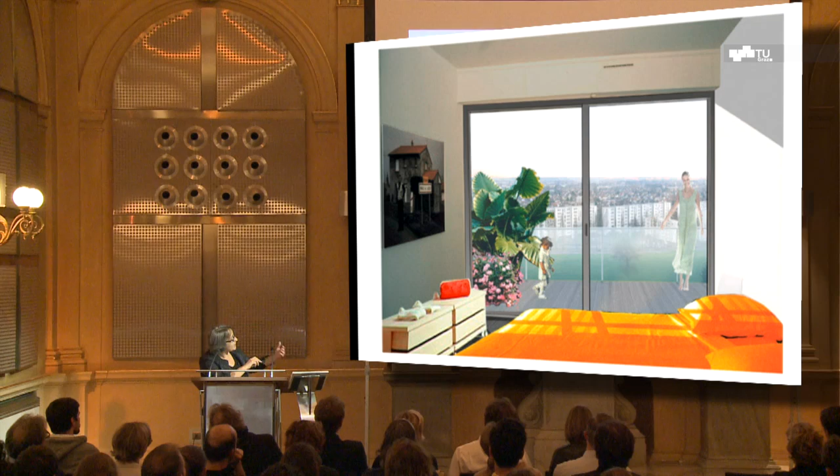So open the walls when there is a very small window and gain the view and make an extension in front. It's not a lot, but it changes radically the life inside. Making extensions when the flats are too small, and that was also possible to make it, and also to make it without emptying the building.

It means that it was important in the study to find the method in order to keep people inside, because one of the problems, for example, in France, is that we miss a lot of dwellings, especially in Paris and in the suburbs. And when they need to renovate a building and to empty the building, it's a very long process to find empty dwellings to remove 100, 200 families. So it was important for us to study the possibility to make the transformation without removing, or removing very few people inside.

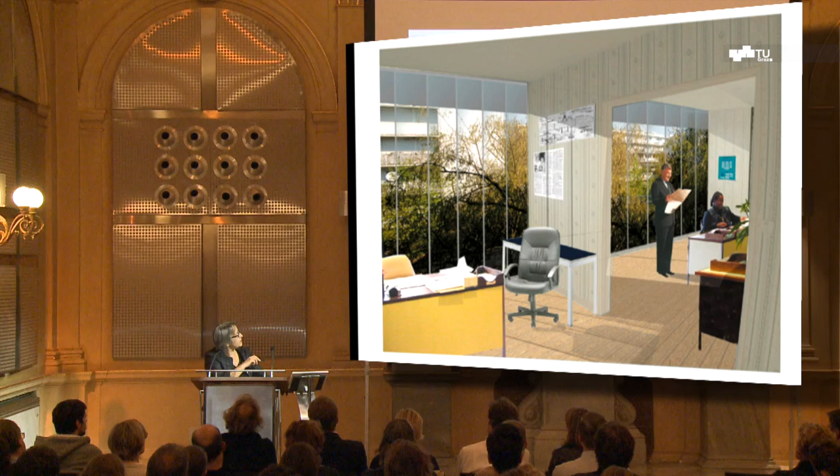Also, this transformation could be the opportunity to reintegrate common facilities that very often have disappeared in the building. There are just a few buildings now where there are housekeepers, where there are common spaces. It's also the possibility to introduce mixed use in the lower levels, for example, offices for companies, but also offices which could be used by people living in the same building or in the neighborhood, but also facilities for the community.

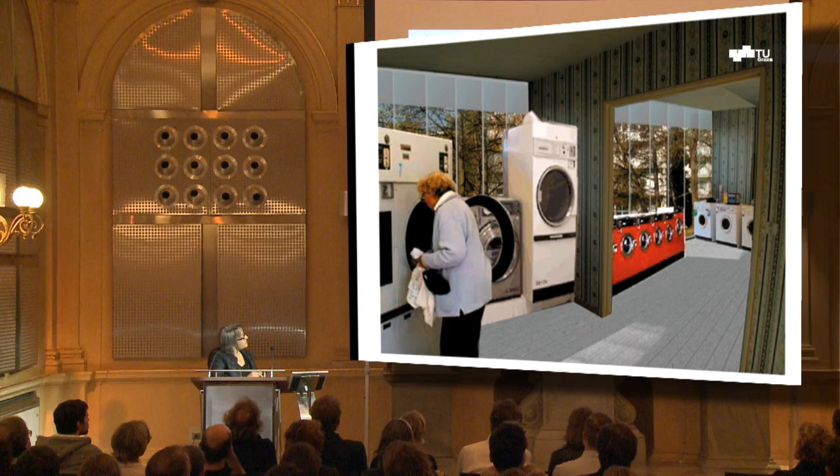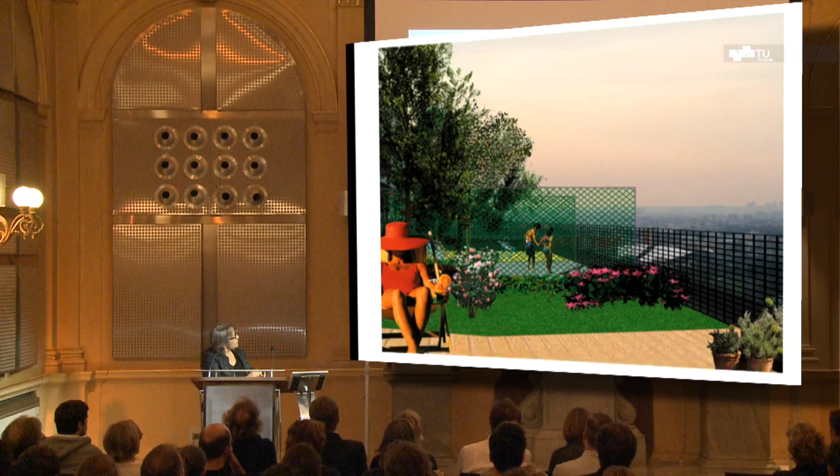Everything that can reintroduce links, relationships between people, because one of the problems in these neighborhoods is that they have become only residential. And people very often stay at home. They have no more links with the others because there are so many problems and nothing to do outside. So the links between people are very often cut. And also the reuse of the roofs that could become more interesting terraces or little gardens.

And we went quite far in this study, and we studied all the technical aspects in terms of structures, of secondary systems, and also in terms of cost, because it was very important to defend the idea that transformation is less expensive than demolition and rebuild, because very often you will hear this: no, we cannot transform because it's too expensive. It's better to demolish and rebuild.

We were talking this morning about the Palast der Republik in Berlin, and you said that they spent a lot of money to take away asbestos. But finally, when asbestos was not there anymore, the building was quite new, and it was possible to reuse it, but finally they demolished it. So it was very important to go against this idea that transformation of the existing costs more than demolition and rebuild.

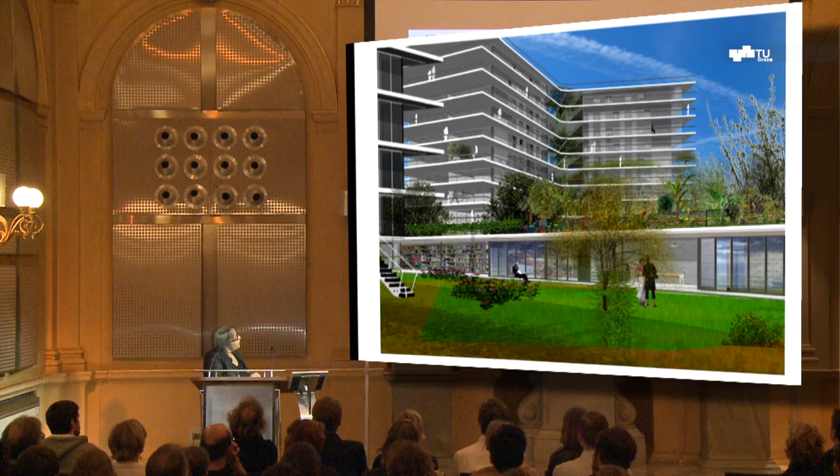And for example, for this building, we did quite a detailed project to know what was possible to make new housing inside. And making this work from the inside, from the quality of living space, produces at the end a very big transformation of the building, the same transformation of the image as a demolition and rebuild. It was also interesting to study the possibility of using better the land around the buildings and to densify a little bit around the buildings to introduce public equipment or other functions.

So this study was not really used, and finally we gave it to different ministries, but it was put under the table. But we managed to publish it in Spain, and we could continue to work on that question with very few examples. Finally, we are more invited to talk about it than to do it, and maybe it's one of the negative situations that we can observe today: the good examples are very interesting to know, but many times when it's the moment to decide, the decision is not there, and finally the owners do as they did before, just making insulation or just a low renovation.

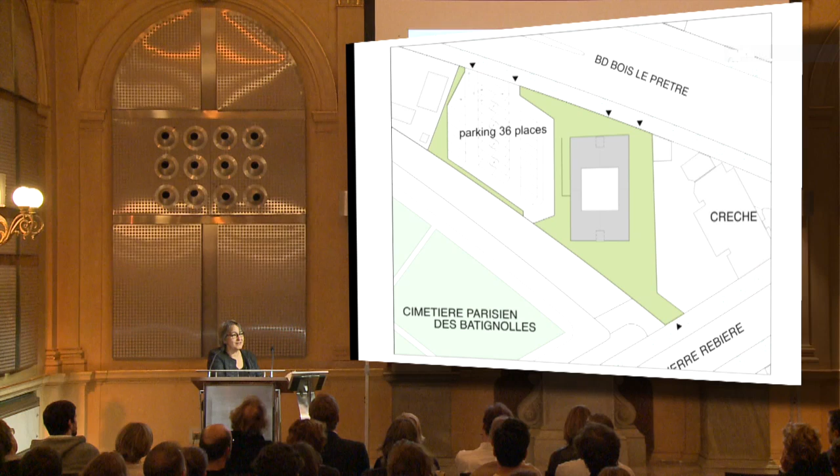And 20 years later, it was necessary again to make something on this building, which had become very bad. It was called Alcatraz in this part of Paris, because the situation had become very bad. So the city organized a competition. They had in mind first to demolish it, but for different reasons, they decided not to do it and to keep it, maybe because they found some difficulties to find 100 dwellings in the neighborhood to relocate the inhabitants. So we applied to the competition, and we could make the competition with four other teams.

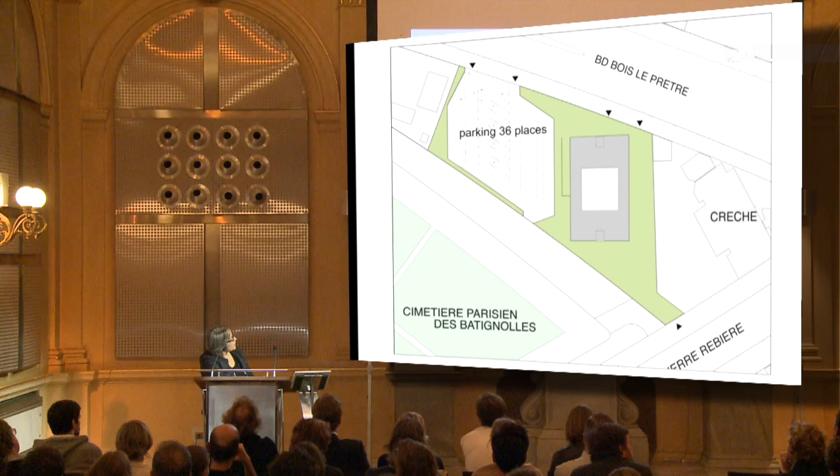So our project that we proposed for the competition was based on a few main ideas. The first one, as I explained before, was to say that the topic of the competition was metamorphosis of the Tour Bois le Prêtre in Paris. It means that they expected a strong change of the image of the building. So we said first that, in fact, we were not interested in changing the shape. For us, the problem was not that it was a high block. It was coming from the bad conditions of housing inside.

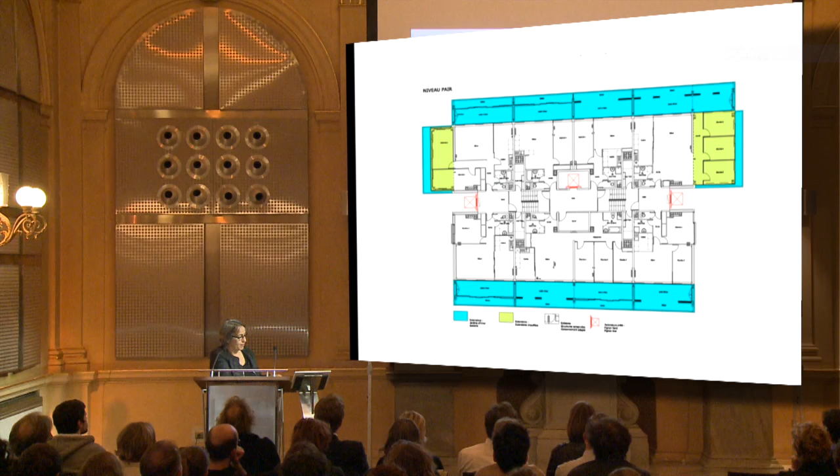So we proposed to start from this observation and to propose an extension of all the dwellings in front of the facade. All the dwellings should benefit from this extension. Then the second main idea was to develop a method of works that allowed to make the construction and the renovation without removing the inhabitants. It means that the inhabitants could stay in the block during the works. And then there was a secondary proposition of changing the elevators, to add 2 new elevators to increase the rapidity of moving inside, and also to make some interior works, bathrooms, kitchens, and so on.

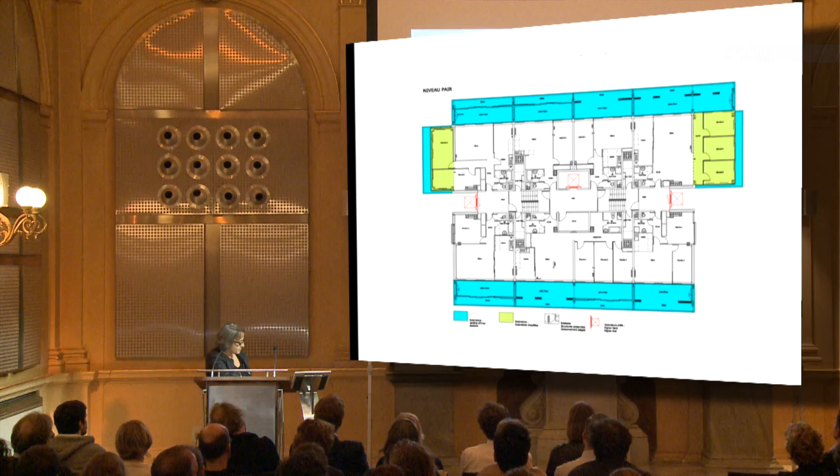So for this project, it was important to develop the method of construction, which was very adapted to this question of occupied site. So it's why we started to think to develop a module of construction for the extension, which could be built outside of the site, because we didn't have land around the block to make these pieces on the place. And then these modules could be built in front of the facade, and they could also be used as scaffolding to take away the facades. We had to take away the 2 facades, the one of the 80s, but also the original one of the 70s, and both had asbestos, so it was also an important and difficult work, and very expensive too.

And this module of extension was 3 meters large. 2 meters was an intermediate space. It means that we had 2 facades. One is a glass facade with sliding doors that replaced the existing facade, and the other one was lighter and could be closed as a winter garden for some seasons, but that could be also widely open for the summer. And also there were 2 kinds of curtains. This one inside is a thermal curtain, and this one was the solar protection. And in front, a 1 meter balcony to give also the opportunity to have an outside.

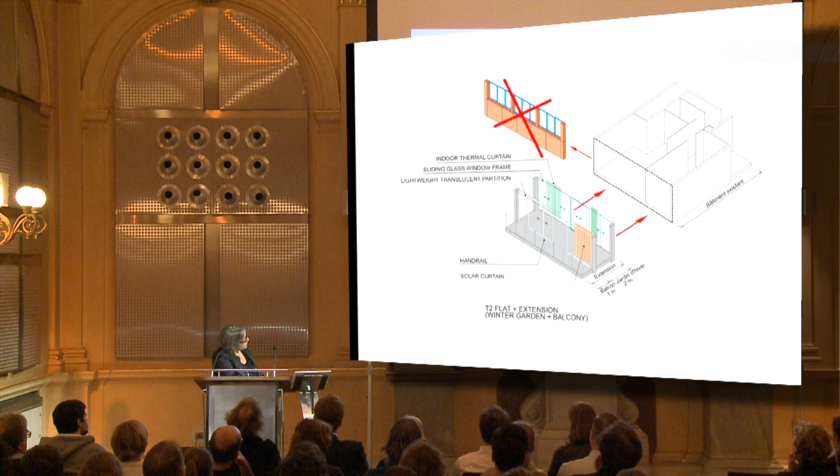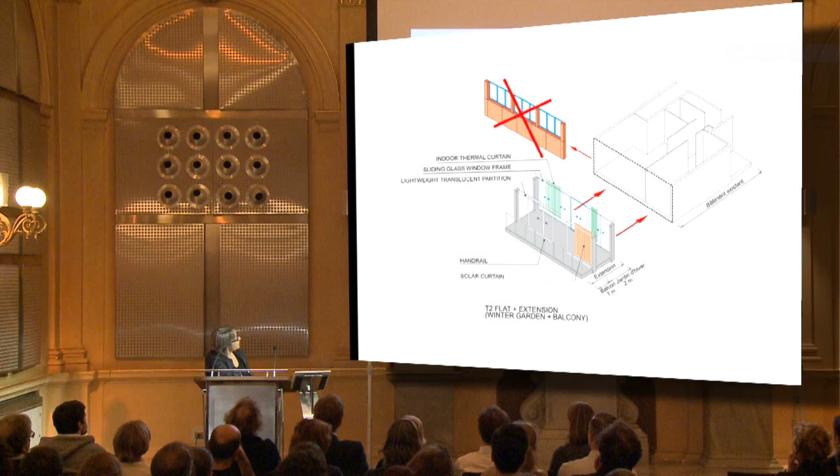And also to allow to clean easily all the facades. So we won the competition, the project was accepted, and we started the process of study. That was here the section of the extension.

Here it was the place of the existing facade, and this module here in front was built in steel, because due to the conditions of the construction site, it was very important that the module was as light as possible. It's why we couldn't do it in concrete, because half of the construction for the crane was made in blind conditions. It means that we couldn't move the crane to the two sides of the construction. So the crane was on one side for all the construction, and the other side was built.

The driver of the crane couldn't see what he was doing, so everything was piloted by cameras or by walkie-talkies. But it was very important to study a light structure. So that was one of the main points of the study, to develop a module which was around 5 to 7 tons, when in concrete it was nearly 20. So that was a very important study of calculating at the minimum the structure needed, because the structure is totally independent.

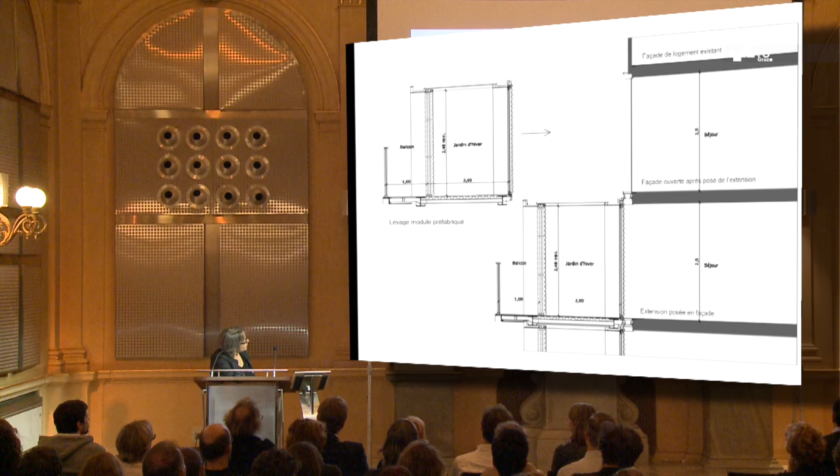Here you can see there are two columns, because it couldn't be supported by the existing building, because we didn't know how it was built in reality, and we didn't know if the existing could support the loads of this new construction. So this was totally independent, just attached at every floor.

And also the possibility to have the same level inside of the existing and inside of the winter garden, as well as, if possible, the same level on the ceiling. The floors at the time were 18 centimeters, so nowadays it's quite difficult to make a floor in 18 centimeters. So it was quite a great challenge for the construction. And also because we need a fire resistance of 1 hour and a half. So all these conditions make it quite difficult. But it's what we have to do as architects or as engineers. It's not the main problem.

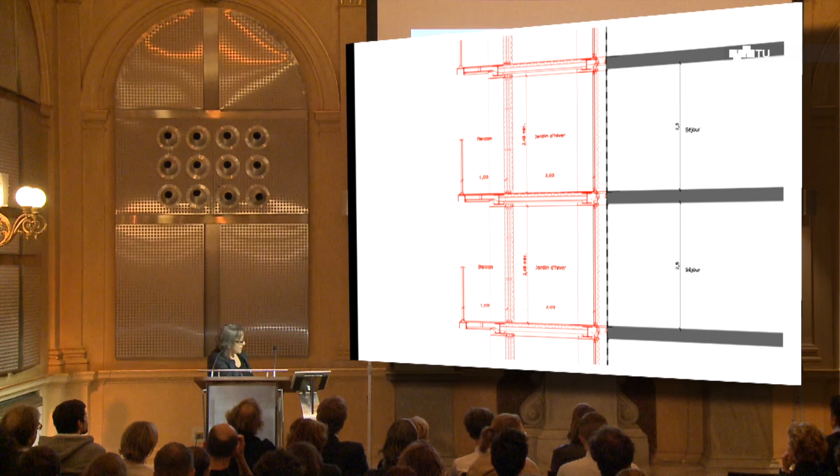The section of the block before and after with the extension. For us, it was very important that all the dwellings should have the same facilities, and not to choose some over others, because the building was all the same, and we didn't make any differences between different levels. If we consider the situation from inside, it was important to give this extension to all the dwellings.

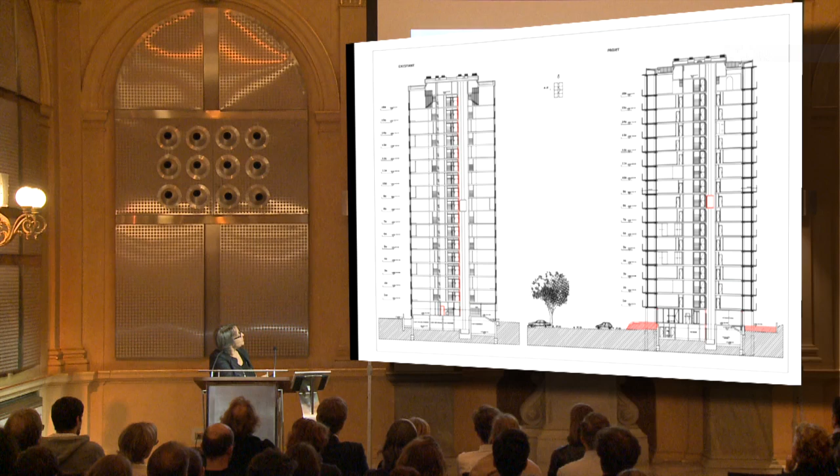We had to discuss a little bit with the administration, because normally now in Paris the level of construction is limited to 37 meters high. So here we could have done only 10 levels or 11 levels, but the administration of the city understood that, of course, it was stupid to stop at 37, so they accepted to change the local regulation so that we could make the extension up to the top of the building.

And then, just after the competition, we started a quite long process of discussing with inhabitants, because we proposed that the inhabitants could stay during the construction. It was very important to consider that they were partners in the process, and not only inhabitants that we have just to inform. And we started a long period of meetings to explain the project, to inform about the extension, about how it will proceed.

And we did first general questions, and step by step we arrived to individual questions. It means that at the end we finally met every family, one after one, to see where they were living and what special needs we could address in their dwelling.

We also discussed with the owner, and as architect, we asked the owner to say immediately to the inhabitants what about the rents after the works, because it was of course an important question for the inhabitants. What will we pay after the works? It was important that it could remain affordable for the families who are living there. It's social housing. All the housing are rented.

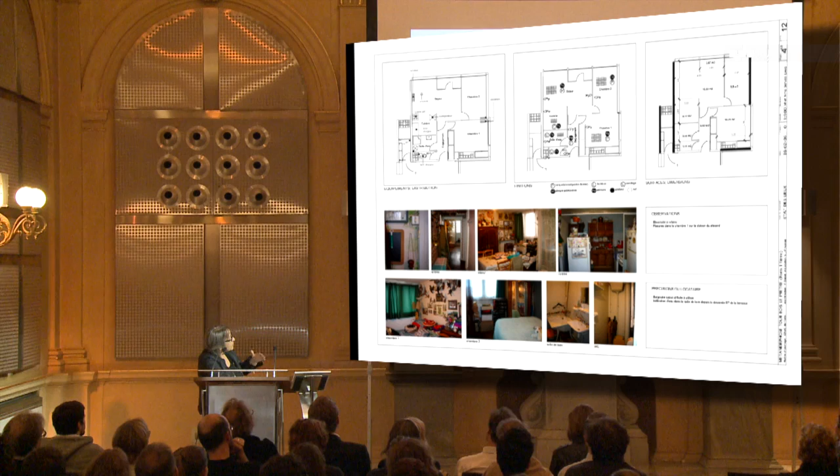So this work was quite interesting, because we could also meet all the people, especially those who would never come to the meetings. And we could see through this visit of all apartments that around 40% of the families were not in the right dwelling. Some old families with only 2 people, because the family has gone, had very big dwellings with 4 bedrooms, 5 bedrooms for 2 persons. And on the opposite, some younger families had more children, and they had very small apartments.

But no one asked to change, because they wanted to stay in the neighborhood. They wanted to stay in the place, and they were afraid that if they asked for a new dwelling, they would have to move to the suburbs or somewhere else in Paris. So the old persons preferred to pay a higher rent and have a big apartment instead of asking to move. So we asked the owner that this process should be very transparent and that we could clarify the situation of every family. There was a discussion with sociologists and all the families, and finally we received an amount of information which allowed us to try to replace the families in the right place.

So this is this scheme. All these arrows mean that the people moved from one apartment to this one, and those were the moves that were operated in the block. But it was not only a question of the size of the typology. There were also more personal desires that we had to manage. For example, I remember an old lady who didn't want to have a view on the cemetery, and she was okay to change, but she wanted special conditions: not to be too high, not to see the cemetery. So finally, after some hard work, we managed to relocate everybody, and everybody was okay with the situation.

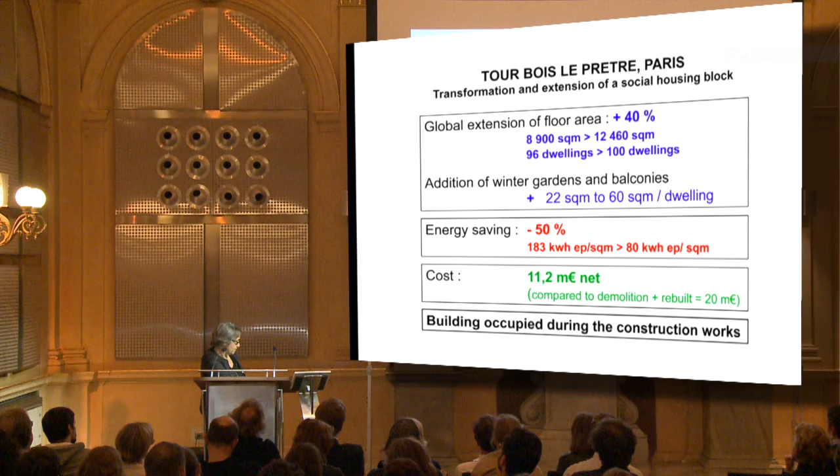And this is the number which was given by the owner, because he estimated that before he decided to make this project. And the building was occupied during the construction. Then we started the process of

construction with the contractor. We had to struggle a little bit with the contractor because it was a very big firm, a French firm, and they wanted to make it in concrete. And we had to struggle because we were really sure that it was the mistake due to what I explained about this question of weight.

So sometimes we had to say that we would stop the project if we couldn't go on in the process of the structure that we had defined. But finally, everything came in the right way, and we could build as we planned to do it. So that was the prototype of the module, which was done on the site of the contractor.

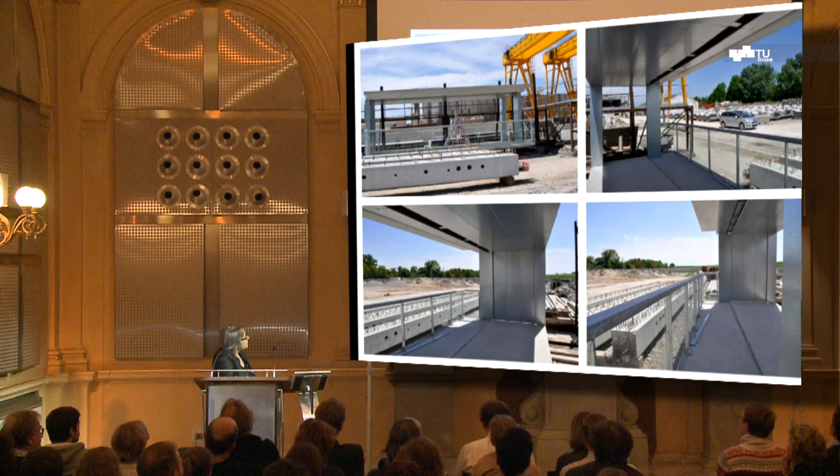And then we started the process of construction. In a way, there were 2 construction works. One which was outside for the extension, that follows, of course, a process from down to top, and another process which was the inside works, which could be done anywhere. Because it was not depending on the structure, so we could refurbish one dwelling here and another one here. The two processes were totally independent.

So we started the construction of the modules. We couldn't do exactly as we expected. It means that build the volume, bring the volume, and then take away the facade. Because finally it was not very clever to transport a module because you transport a lot of air. So it's very expensive, and they preferred to transport separated elements, floors, handrails, and just to make the assemblage on the site.

So we did first the work of taking away the facade. Then we replaced from the top to down by the new facade, and then we put some temporary handrails, and then we started the process of construction of the modules. So they bring the floors on the site, then they build the handrail, they put the windows of the winter garden on the floor, and then they elevate all the system.

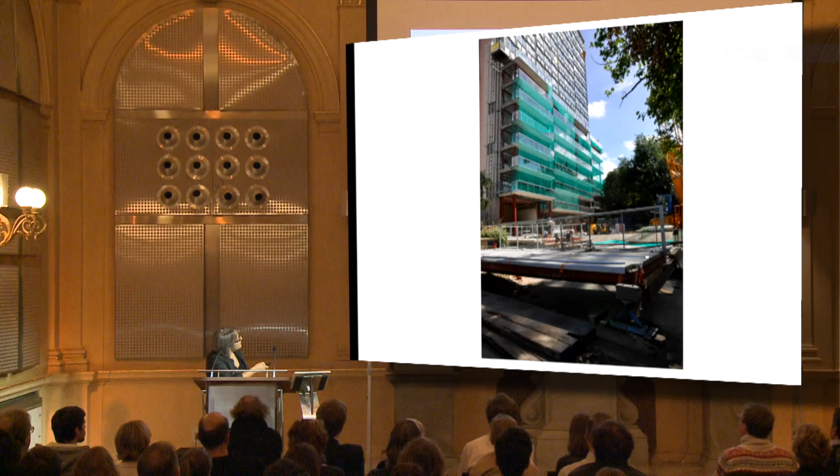So the schedule of construction was 6 to 7 modules a day. We had 150 modules to build. So it took 3 months to make all the extensions around the building. And then there was another 3 months to make the protection of the steel structure for the fire resistance. And after again 3 months, the building was completed.

So from the existing to the new one, just by this work of starting from the inside and trying to give air, to give more view, to give more space and more quality of life. So just some pictures before and after. The entrance before, the entrance now. On this picture you can see the 2 columns of this 3 meters extension. Only the balconies are in concrete. Sorry.

So the entrance, which was very narrow before, with the steps inside, we changed the floor outside to bring it at the same level and to facilitate the access. This apartment that you saw before and after the extension. So many times the work has been done just after the window. So we took care for some apartments just to work from the window to the outside.

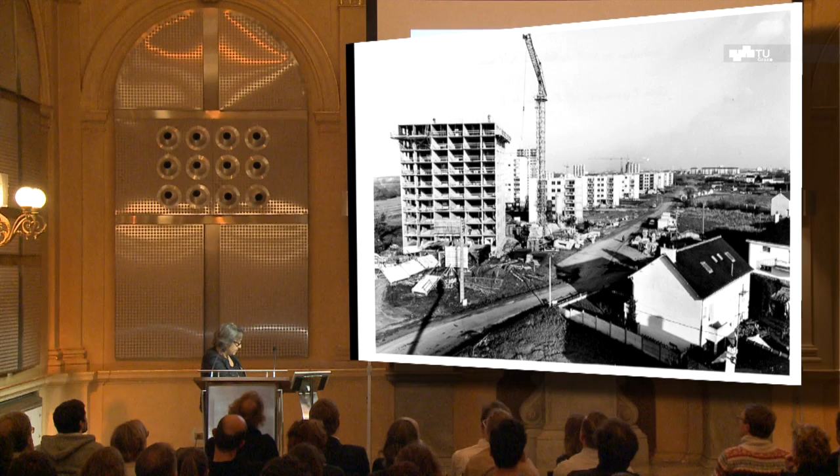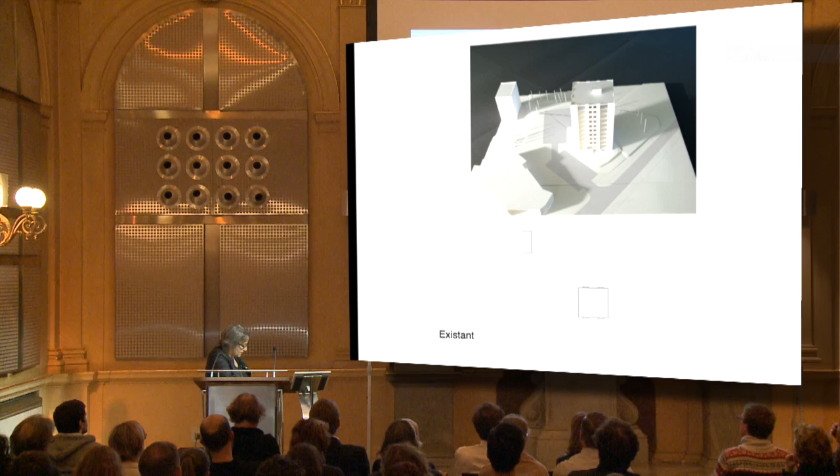So we started to work with the same ideas that we developed in the project in Paris, always starting from the situation of the dwelling inside to see what was missing. And we arrived again at the idea that it was interesting to make extensions. But the situation was very different from the one in Paris, and we had a lot of empty space around the blocks, because the footprint of all the blocks was less than 10% of the area. The 90% was occupied by green areas without much quality, but also a lot of space was occupied by car parking.

So we proposed here to introduce the idea that in parallel with the renovation, the transformation, we could also think about the question of densification. Because what is surprising when you study these buildings carefully and talk with the inhabitants, they always talk about too much density, because they feel compressed inside the building: the spaces are small, the common spaces are small. It's a kind of contradiction, because they feel compressed in the buildings when around the buildings there is so much empty space. So we started to think that maybe densification on the ground could allow us to give more space, to extend the individual space, and that this question of more density could be totally inseparable from giving more individual space.

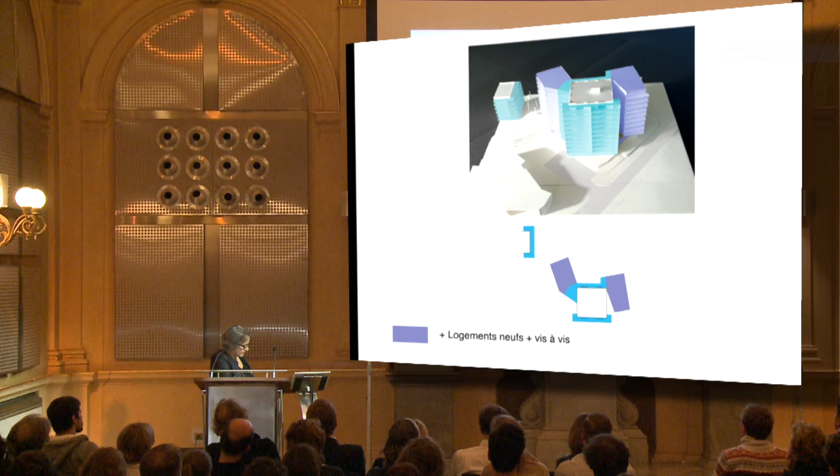So we had 40 dwellings in the blocks that could be extended, but we could also make 40 new apartments with these 2 new wings on each side. Here was the car parking that could be introduced in a block with a green roof. And the process really starts from the apartment itself.

That was the existing, and one of the main problems in the apartments was the bathroom, which was very, very small, less than 3 square meters. That was the main problem mentioned by the inhabitants, as well as maybe the size of the living room. So we proposed to move the bathroom into the smallest bedroom, which is 9 square meters, and to build an extension which was not only a winter garden, but also a new bedroom connected to the apartment by the winter garden.

So the dwelling gained a new bathroom of 9 square meters with a window, in better conditions. It gains a new bedroom, larger than the other one, a winter garden, and a balcony. It means that in the end, it's 33 square meters of extra space that every dwelling gains in the process. And in terms of cost, with 40,000 euros of works, we could do that.

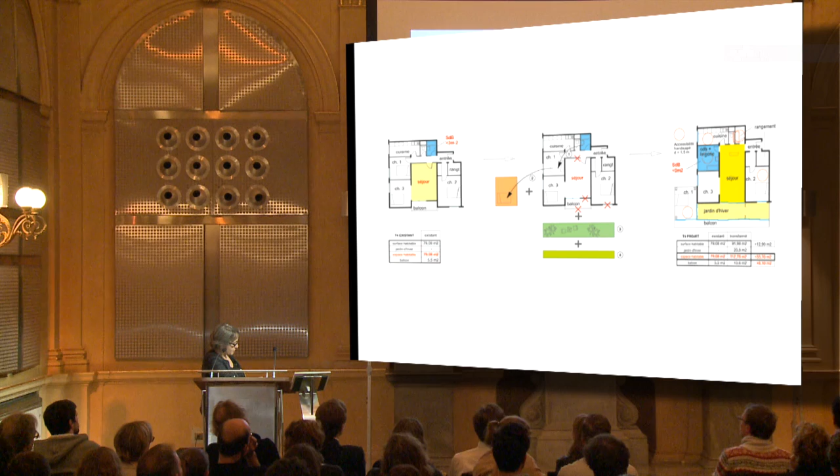So for the building itself, we could make this extension, and with the addition of the 2 wings, we could also make 2 new entrances and new elevators. The dwellings in the existing block could be served by these new elevators. So it was also an opportunity to give more comfort to the common space, because there are now only 3 dwellings per level.

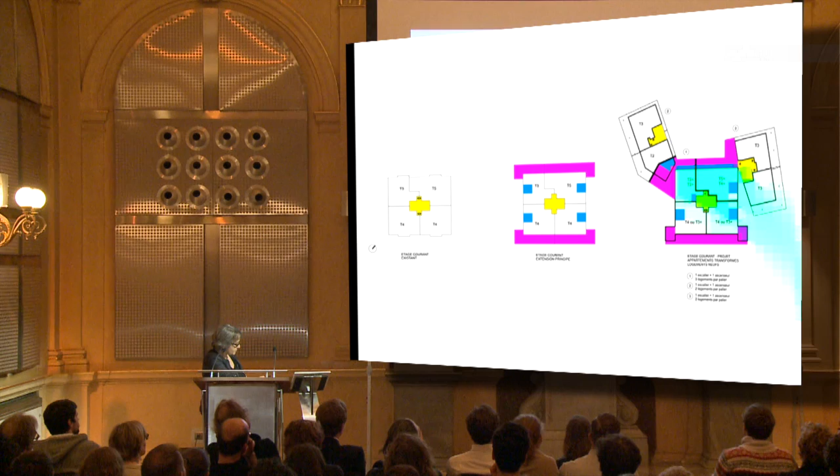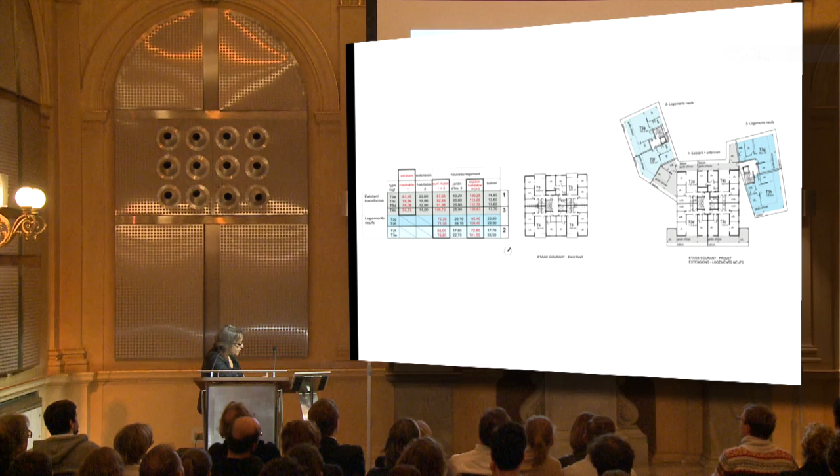And that was the project that we proposed, and which was accepted by the owner. And also finally the new construction, which was a new budget, gathered with the budget of the transformation, gave a bigger amount that allowed to make more than just only the renovation. So the 4 existing dwellings with the extensions. Here, this one, they have an extension here, and this one, they extend on the new wing. This one can gain a new orientation.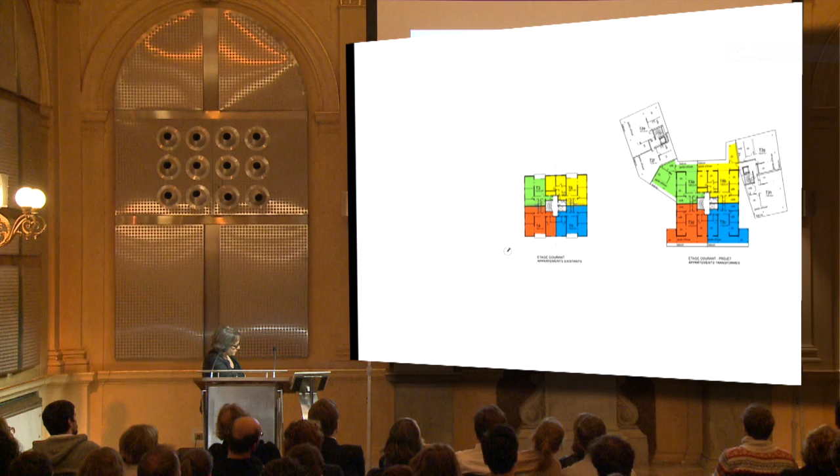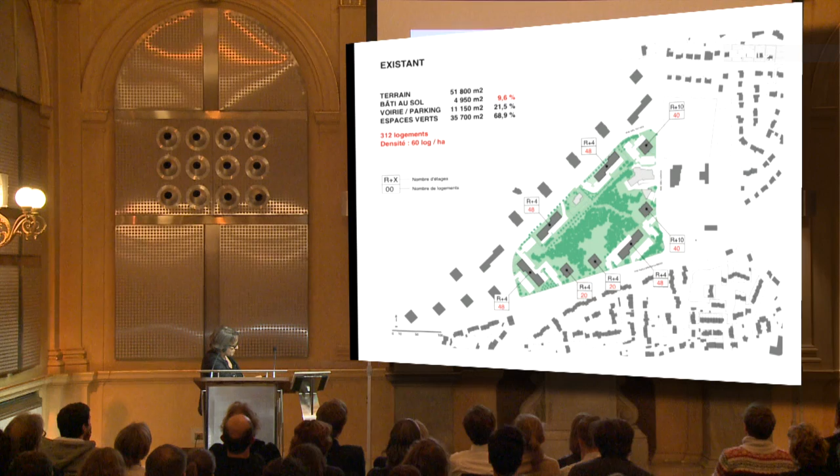And we expected, again, to change radically the image by doing this extension. So the idea was also that this building could be the first step of better densification of the neighborhood. Only in this part, we had 312 housing with a footprint of 9.6%. And we proposed to make the same for all the buildings, that they could win more than 250 dwellings on a land which was already owned with all the equipments, without changing so much this green space in the middle, which was the most interesting green space, but just by covering the car parkings here and making additions on the blind walls of the construction.

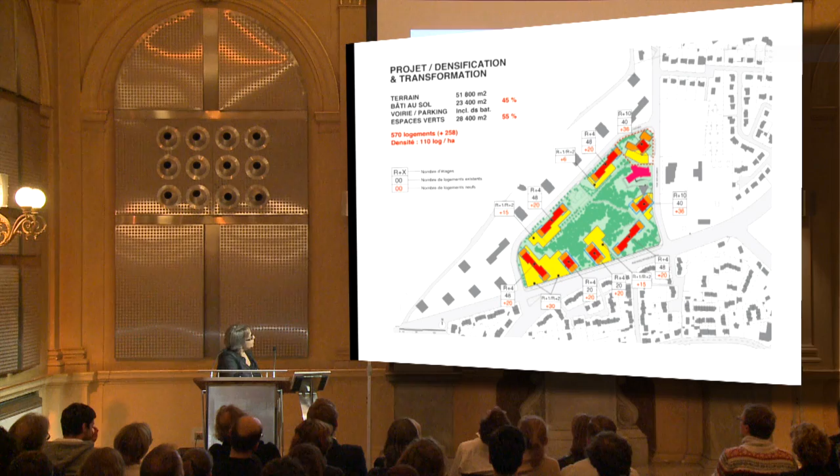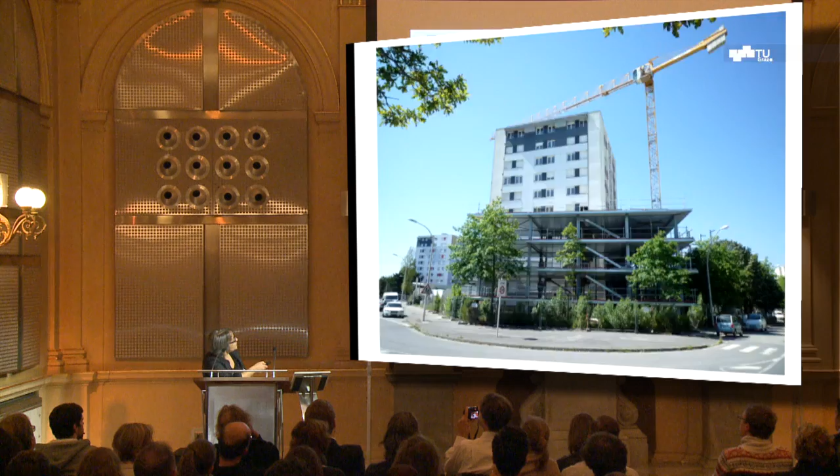We used here also a steel structure, but totally prefabricated with a steel structure, but also prefabricated slabs with steel, mineral wool, and concrete. It's a process from ArcelorMittal. We had some difficulties because we calculated that it was possible not to protect the beams because they were integrated in the floors, but it was very difficult to get this idea accepted by the firm of the control of the construction. So the construction stopped for many months, the time that we could demonstrate that this calculation was valid. But we could go on with the process of the construction, which could go quite fast.

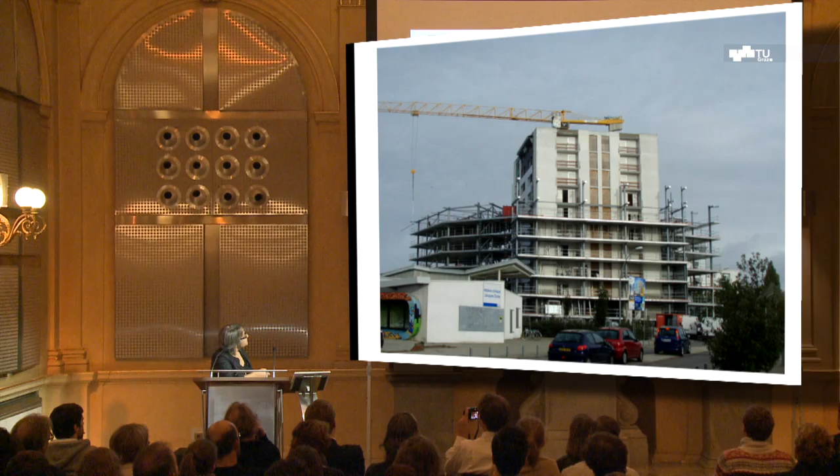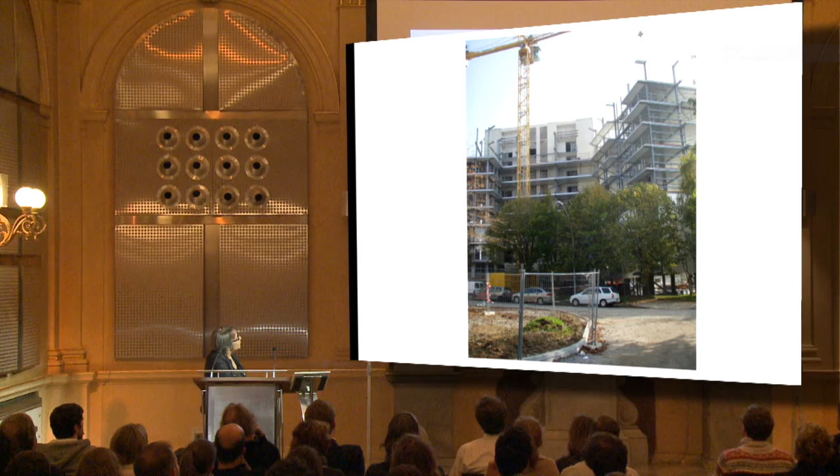To build the structure, it's a kind of dry structure in front of the existing, but also for the new wings. And the building, step by step, the existing totally disappears in this new envelope. And at the end, the new building. So the new wings are completed since last December. And for the existing, we have, again, a last problem to solve. When we wanted to refurbish the inside, we found traces of asbestos in the rubbers behind the ceramics. So it's, again, necessary to have a special process to take away the asbestos. So it takes another 6 months to solve this problem.

But in the meanwhile, the director of the social housing company has changed, and the new one was not so much involved in this question of densification. In the meanwhile, they have renovated all the other buildings in a very basic way, and I think that to continue the process of densification maybe is now delayed. And the new appropriation now for the inhabitants with the flowers on the balconies. It's social housing, all public social housing, so the dwellings are rented.

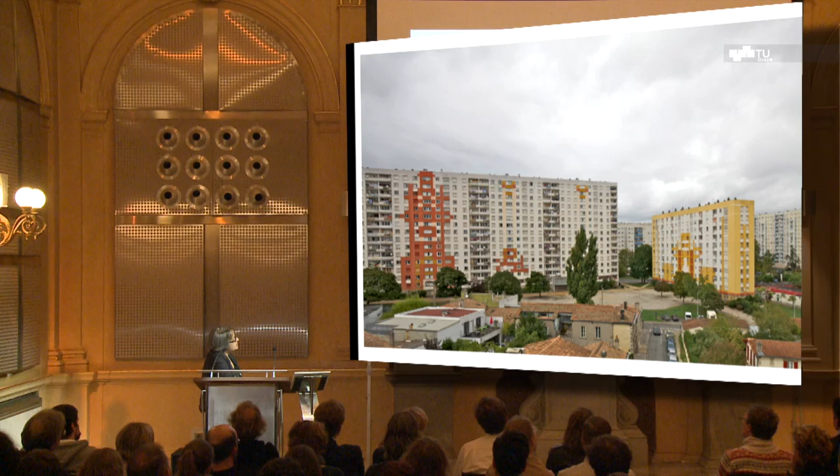When it was built, it was the suburb of the city, but now it's totally inside the city center with a lot of equipment, with transport, and also this neighborhood has now been listed in the perimeter of UNESCO, because the city of Bordeaux is listed at UNESCO, and finally they decided to integrate this neighborhood as a part of the city.

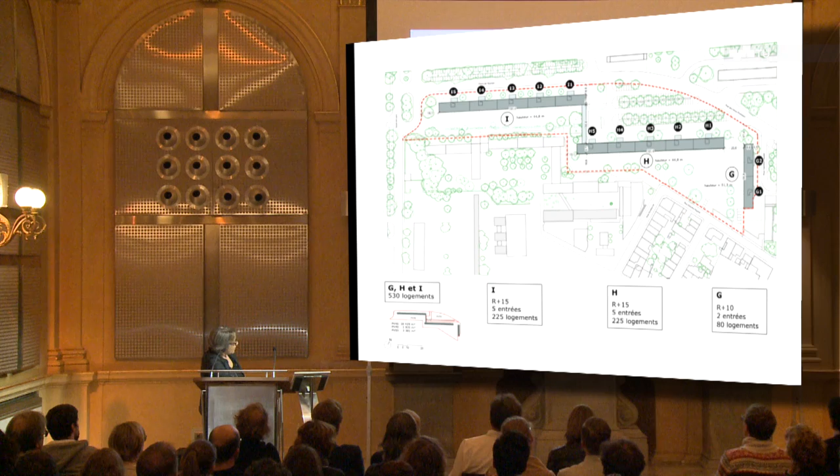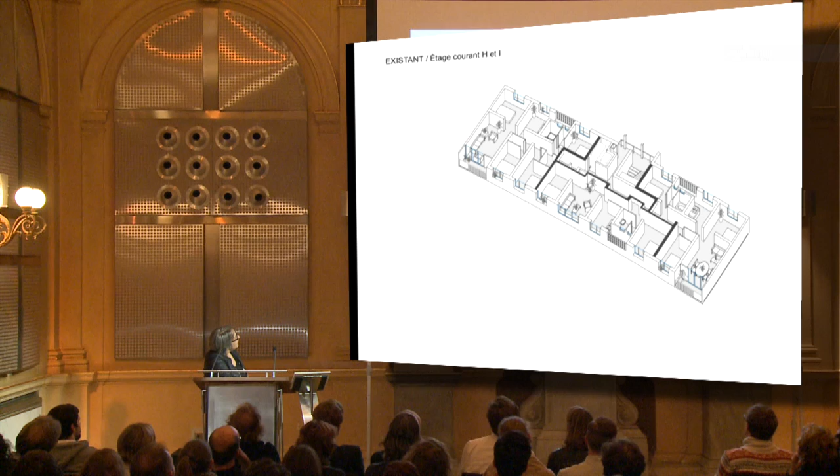So here we have a different situation than the two others, but anyway, we propose also to make extensions, extensions on only one side because the blocks are quite narrow. Two thirds of the apartments have a crossing orientation. This is south, this is north, so they have orientation south to north. And one third has only one orientation, but oriented south. And they are served by elevators and one corridor.

So we propose to make an extension only on one side, because of course we could have done both sides, but the budget is not very big. It's 45,000 euros per dwelling. But this extension here, because it's quite empty in front, is much bigger than the one in Paris: we have 3.80 meters, when in Paris we have 2.80 meters, so it means nearly 1 meter more.

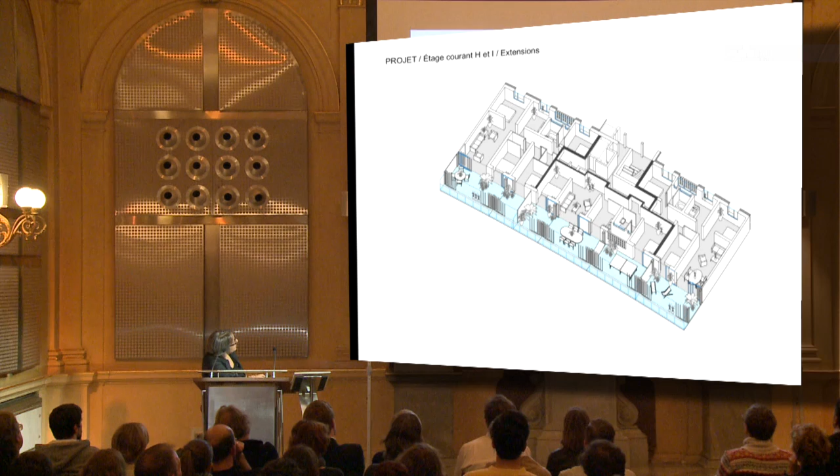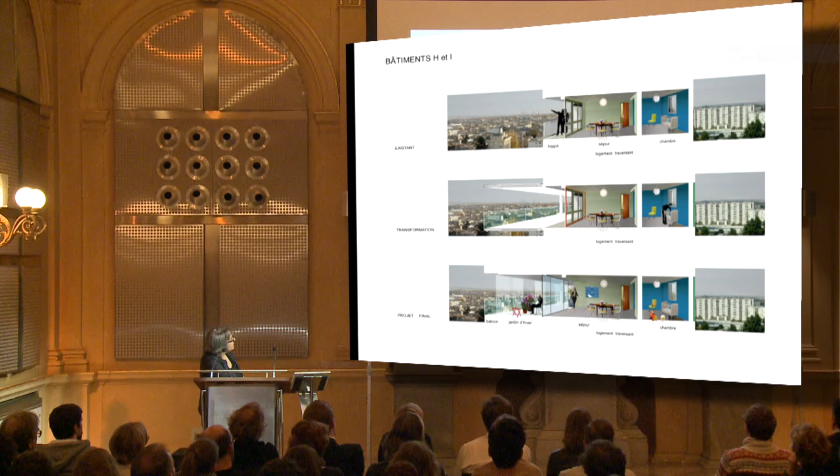So this is the process from the existing, with sometimes little loggias: building the extension, opening the doors or the handrails, and then the extension of the dwelling can be done. So we studied here again a process of building that would disturb as little as possible the life of the inhabitants. So we arrived at a process of extensions with 5 days maximum of disturbance in front of the dwellings for the inhabitants.

The interior works: mainly we refurbish the electricity, we remake new bathrooms, and we make new plumbing. So it means that it's 5 days inside to renovate the bathroom, but every night we bring the water back. It means that the family can be outside during the day, but in the evening when they come back, they can again use the kitchen and some elements of the bathroom.

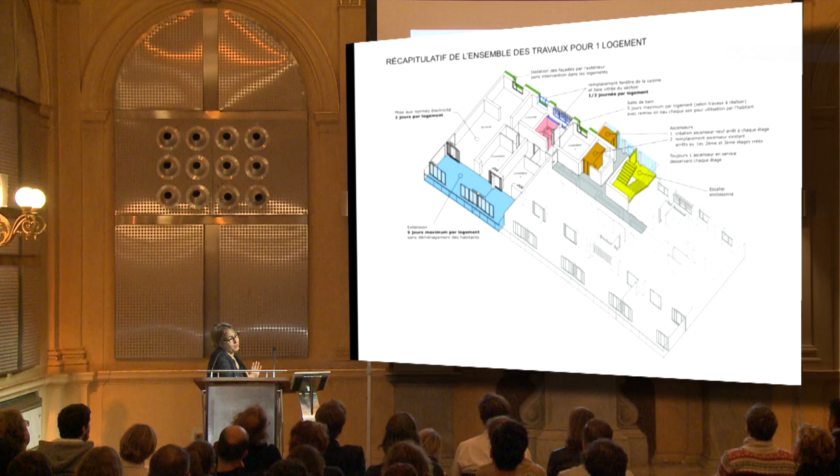And then we have also some works such as a new elevator. We change the existing elevators, we enclose the fire exit, and we bring some new fire protections, because this building was built in the early 60s and some regulations were very different. So we worked on the basis of this schedule of works. Electricity is 2 days per dwelling, but we did some tests and could observe that now they take only 1 day. With a group of 5 workers, they can remake the electricity in 1 day.

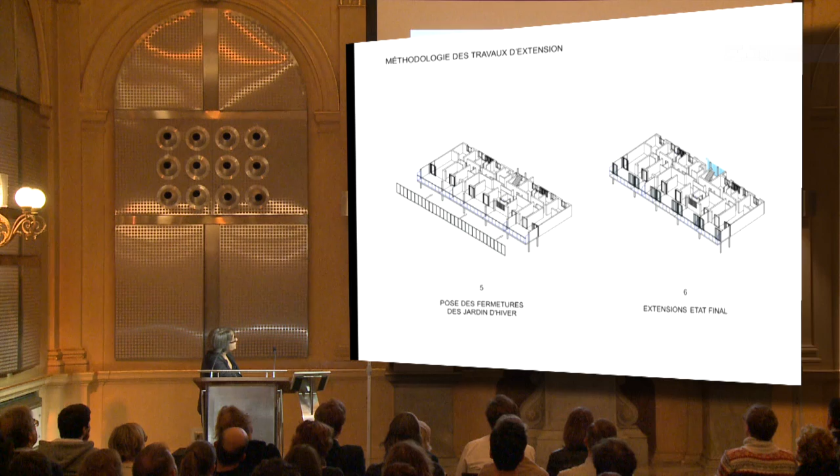And the process of construction with the existing, bringing the modules. When the modules are built, we need to build 3 levels, and then we can again operate on the extension. We take away the existing windows, we open the handrails, and then the facade of the winter gardens, and this is the final extension. These are some renderings that we did, so that every room can open onto this extension, even the kitchens, the living rooms.

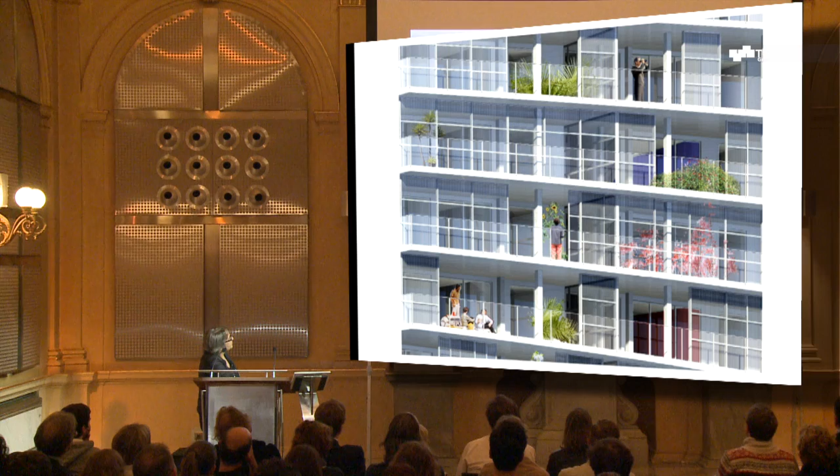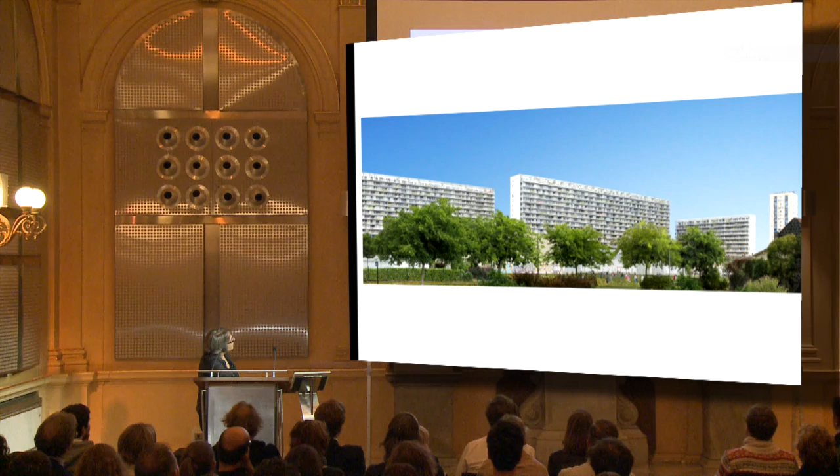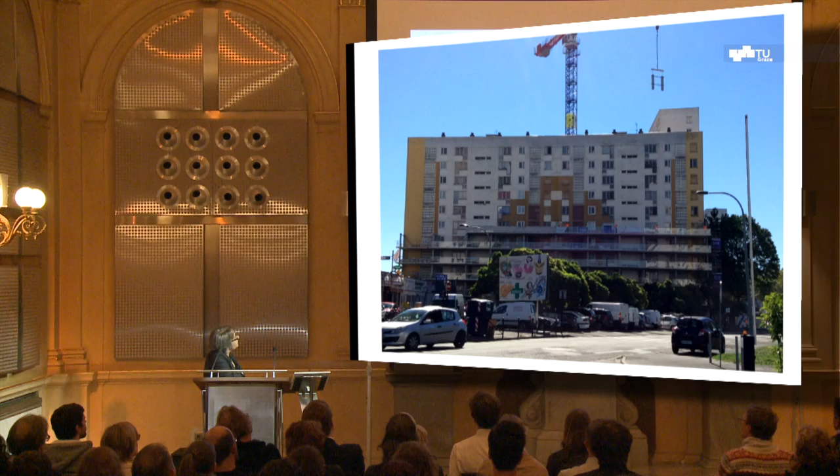And one picture from the extension. That was the prototype, which was done before. And the openings, and the floors, which are at the same level. So we are going on with this process, and here again, we have only 2 empty dwellings that we use every day when needed to allow a family during the works to cook or to stay inside. But normally, every night they come back to their dwelling.

And what is important in these renovations is that they are not only interesting cases of how to renovate buildings; there are much broader ideas: in the cities there are thousands of situations like this one where we can bring better quality, where we can bring more. Here, this is in Paris, but it's important to do this work close to the ground, close to the situation, and not only looking at the city from the map.

And when you do this work, you can not only renovate, but also find here and there some situation where it's possible to operate densification. And this densification has quality, but also is very safe, because it allows to use better everything we have in the city and not to extend too much.

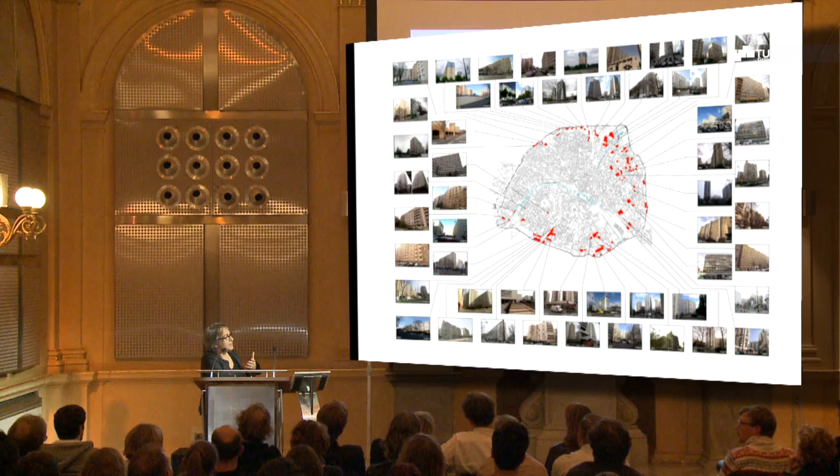And for us, again, the question of density starts from better individual space. We are totally convinced, this is the same work that we did in Bordeaux, we are totally convinced that without giving more to the individual space, we cannot succeed in densifying the city.

Thank you. Thank you very much. Thank you very much, Lacaton. We now have the opportunity to ask questions. Maybe I can ask the first question.

It's not very usual for architectural offices to do studies, basically. What was the initial study, the Plus study, in combination with some university work? Or was it just a very abstract way to deal with the topic you are interested in?

No, it was our decision with Frédéric Druot, who is a good friend. We studied together, and we discussed for a long time about this question of demolition, renovation. And when this program was launched in France with this very big budget, for us it was really a shock, and we decided to do something.

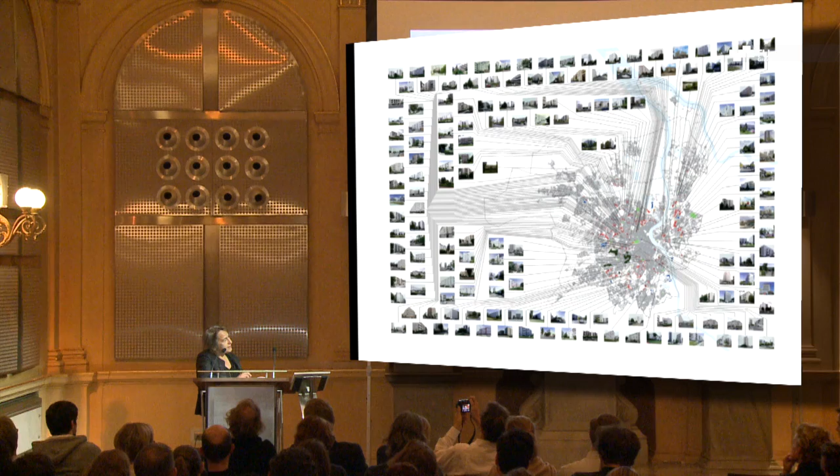So of course it's the question of the project, but it's a question of how it works a long time after. Of course we can evaluate what we could do in a different way, but we never thought that it was a mistake to do that, because in any case the quality of housing has become much better, and this is a value which cannot be subtracted.

So the other question then is much more a question of society, of how in our societies more responsibility is given to the inhabitants to organize, and maybe in France we don't have this practice enough. We live in a country where the government has a lot of influence in many decisions, and we have to learn how to make it better. But it comes step by step, and here and there we can see that people become more responsible, they organize associations.

So I think that when you are in this kind of project with, at the beginning, a lot of risk, it's important to take this risk and to work carefully so that the risk remains acceptable. But it's very important to always go in this way of innovation. We think that it's much better than just making technical innovations, because just by seeing how people have rearranged the furniture, have reorganized the life inside, even if they complain, you can feel that for them there is a kind of better comfort. So we have no regrets, and of course we try to learn. Nothing is perfect, but we're trying to learn for the next.